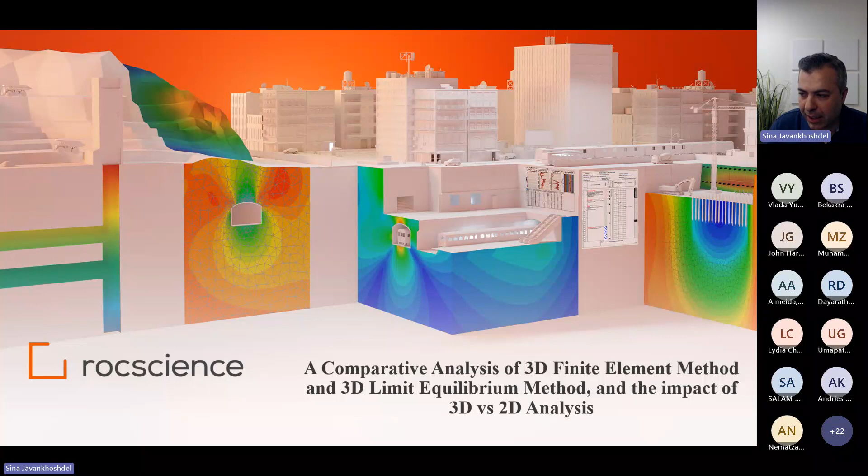The title is a comparative analysis of 3D finite element method and 3D limit equilibrium method, and the impact of 3D versus 2D. As Rajit mentioned, I'm the product manager of Slide2 and Slide3 software and have been working on these finite element and limit equilibrium software packages, making models for customers for the past 7 years.

First of all, this is not an advertisement webinar. I'm trying to keep it technical, but obviously I use Rocscience software to show you what these impacts are and what the details are. I'm going to warn you, some of you may not agree with what I say and may have questions. I totally understand the different aspects and different thoughts on these concepts because they are very broad. But these are based on our experience at Rocscience and my personal experience, and I'll show you different practical models as well.

Before going to the technical part, I just want to introduce us and show you some details about Rocscience. We are the world leader of innovative 2D and 3D software for civil, mining, and geotechnical applications. We have over 25 years of experience, more than 10,000 customers around the world, and we really are the world leader of 2D and 3D software packages. We have 18 software packages for different applications, but I'm not going to talk about all of these, only 4 of them. I'll show you which ones I'm going to talk about.

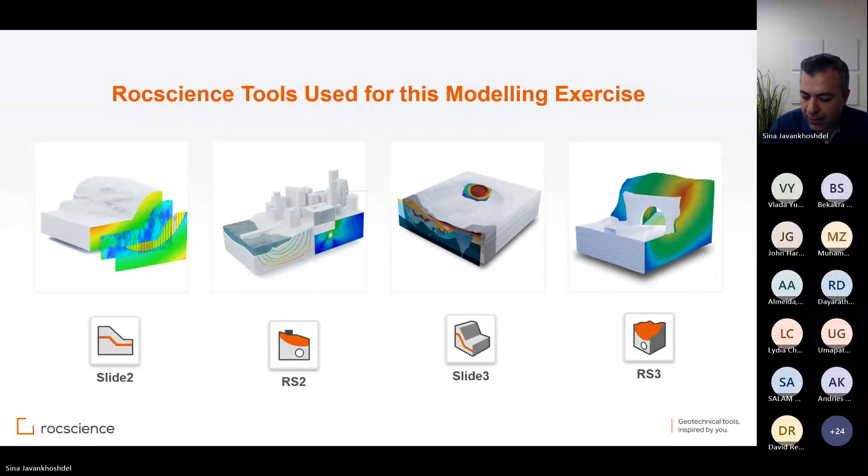So part of this presentation comes from a developer's perspective, because as a developer of software, you need to think general. You can't just focus on a specific thing. This helps us understand the details more of what our customers need, what they think, and what we should do on our side. So let's jump into the presentation.

The other thing before I start: I'm making a case, I'm telling a story here. So I will go step by step to the end, and hopefully we reach a good conclusion. Let's start with simple 2D limit equilibrium analysis and see what's going on there, and then we go further.

So basically, when you want to do any 2D limit equilibrium analysis, you need to consider all these aspects. You need to have a slope geometry. You need to know your geological models, which are the layering, slope layering, soil profiling. You need to know the groundwater condition, the loading of the model.

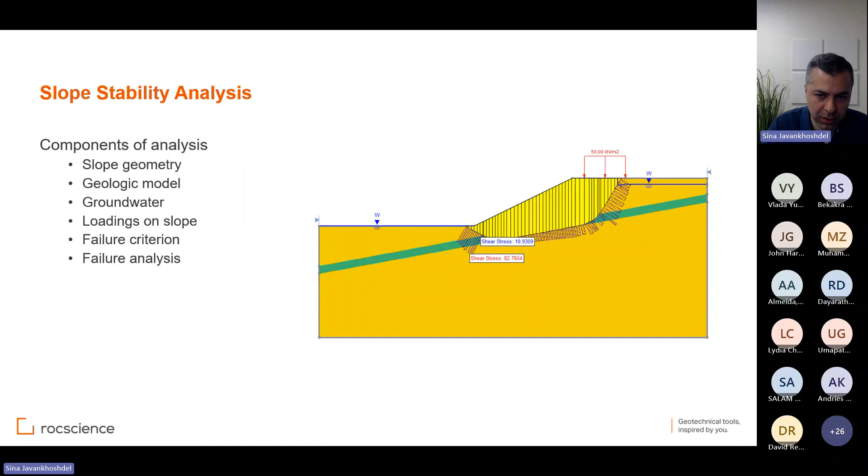You need to define your failure criterion, which are constitutive models or material models. And then you need to decide about the failure analysis. So here we do limit equilibrium and finite element analysis. We do finite element analysis for the failure analysis part.

In limit equilibrium analysis, there are two steps that some of you might not know is actually what's happening. First, we compute the shear strength required along the potential failure surface to maintain stability. So the goal in limit equilibrium is to maintain stability and calculate the equilibrium condition. Then we compare the required shear strength to the available shear strength.

So what is available shear strength? It's coming from your soil properties that you define and the criterion that you define. For example, here we define Mohr-Coulomb failure criterion. So you know your available shear strength.

A lot of times you don't know your required shear strength, but you know the goal factor of safety that you want, and then you calculate your required shear strength. So you know that C plus sigma tangent phi, which is the Mohr-Coulomb, and you know the factor of safety, the goal factor of safety, and you want the required.

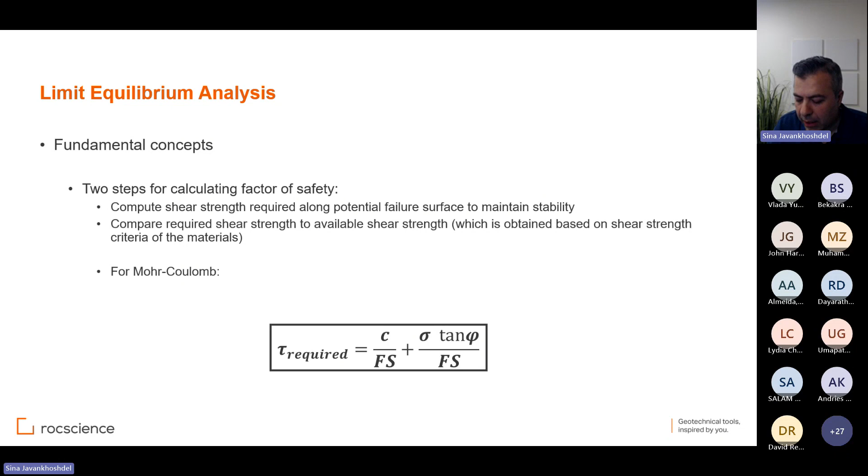In a slide, you don't know the factor of safety in advance. So you have the required shear strength, you have the available shear strength, and based on the calculations, you calculate the factor of safety. Keep this equation in mind, I'm going to use it later on in the presentation. It's a very important equation that we're going to talk about later.

So limit equilibrium analysis in 2D is called the method of slices, because we can't solve for this factor of safety by only solving based on one critical slip surface. So this is an unknown problem, and we have to simplify it to be able to solve it for the factor of safety. That's why we divide it into slices to make it simpler.

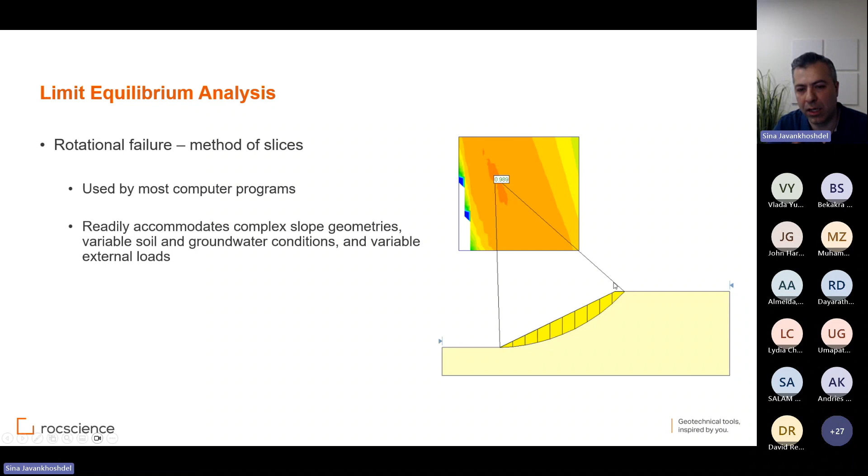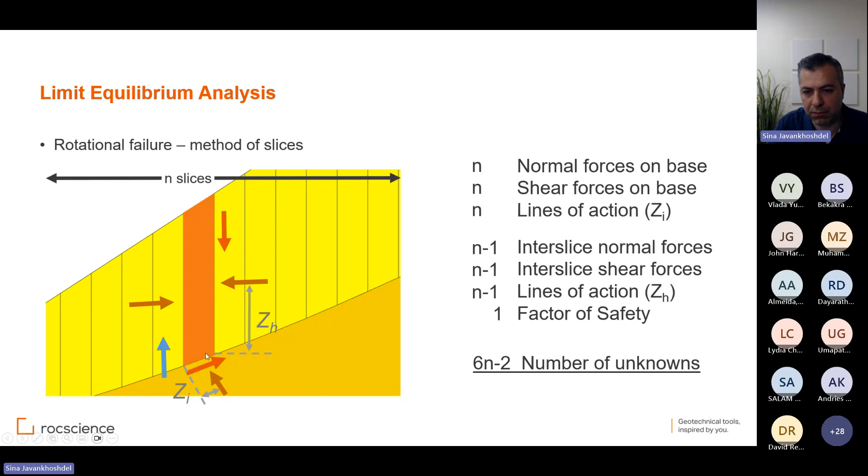For these slices, let's say we have n slices. Let's see what we have as unknown parameters. We have n normal forces on the base, n shear forces on the base, and also interslice shear and normal forces. The other unknowns are the factor of safety and the location of these forces applied to the base and side of each slice. So there are so many unknowns, 6n minus 2 unknown parameters.

How many known parameters do we have? We have 3 equilibrium equations: moment, horizontal force, and vertical force. And we defined our failure criterion, which is Mohr-Coulomb failure, so we have n Mohr-Coulomb relationships as well. So the total is going to be 4n.

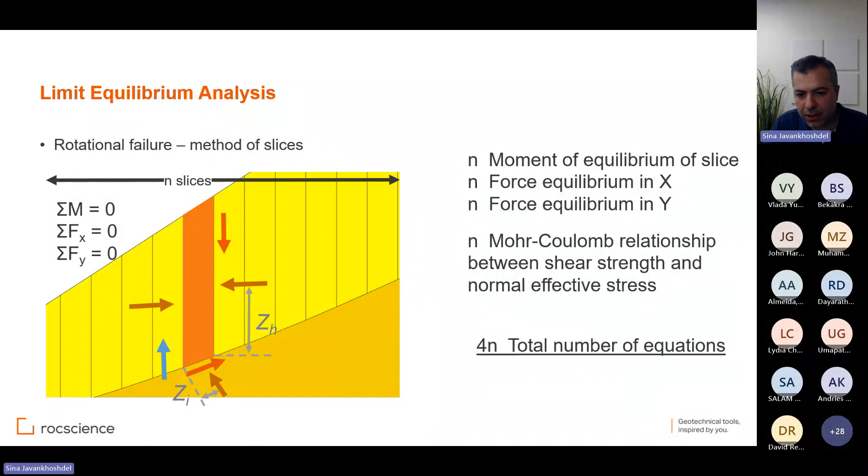We still need a couple more known things, so we have other assumptions. One of the most important assumptions is that all the forces are applied at the midpoint of the base of each slice. So Zi is equal to half of the base of a slice. That gives us another n known parameters. So we are left with n minus 2 unknown parameters.

And we need to solve these equations. That's why we have 11 limit equilibrium methods to calculate factor of safety, all coming from different assumptions that they use to solve these n minus 2 unknown parameters.

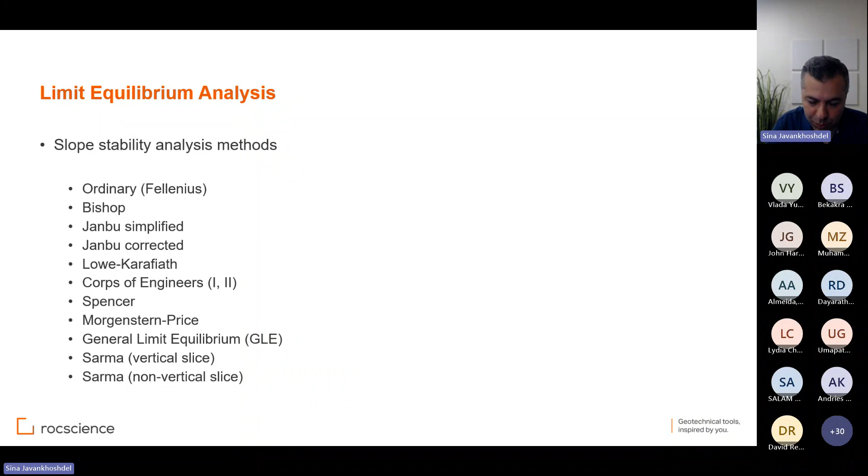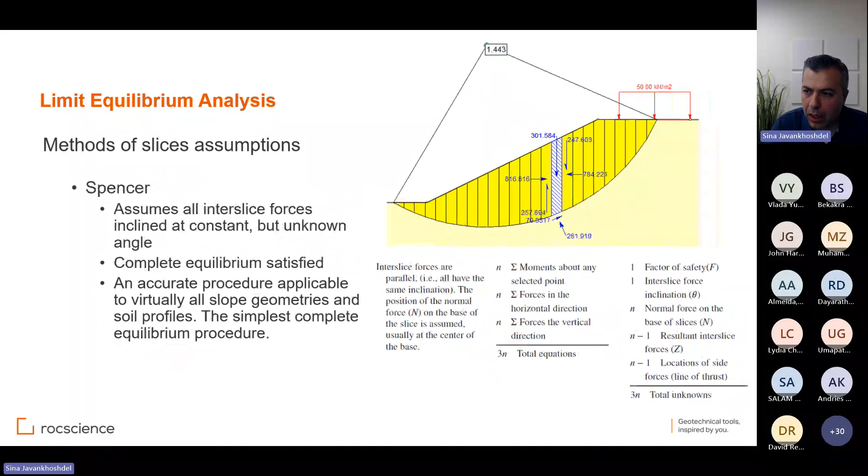We focus only on 4 of them: Bishop simplified, Janbu, Spencer, and GLE. Basically, they have different assumptions. Bishop assumes that interslice shear forces are 0, and Bishop only satisfies the moment equilibrium. Janbu has the same assumption, so shear interslice force is 0, but it only satisfies the force equilibrium. And Spencer and GLE, or Morgenstern Price, they satisfy all the equilibriums.

The only difference that they have is about the direction and the angle of the normal interslice force applied to each slice. Something interesting to know is Janbu always gives you the lowest factor of safety compared to the other methods.

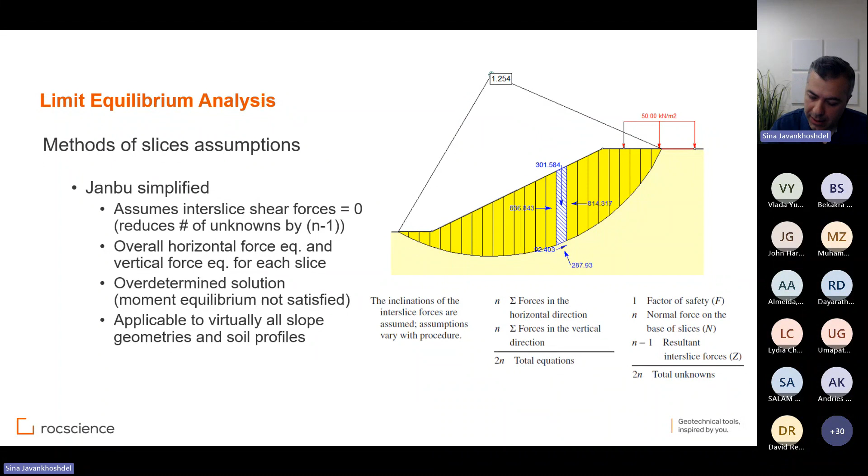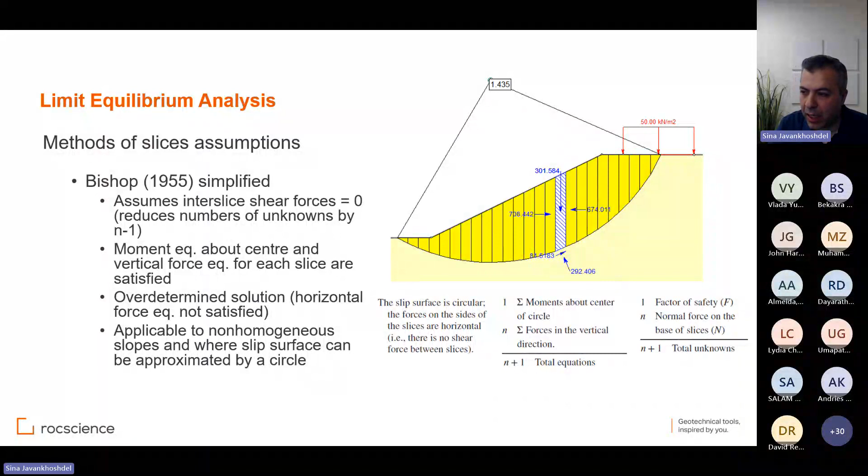When you use non-circular methods, do not use Bishop, because Bishop only satisfies moment equilibrium, and the moment is going to be around the center of the radius. For non-circular methods, we change this center all the time, so for some models, Bishop cannot give the correct answer. But Janbu and GLE and Spencer most of the time give the most accurate results.

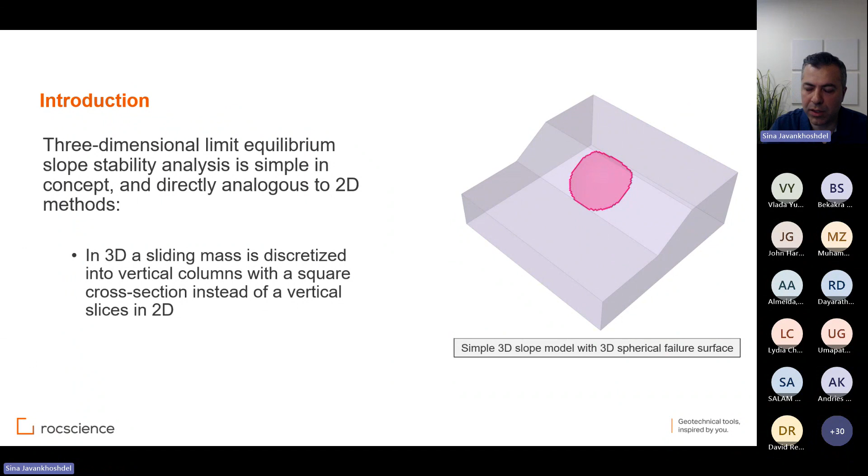How about 3D limit equilibrium? So we talked about this method of slices. 3D equilibrium is the same concept—that one is in 2D, this one is in 3D. Instead of method of slices, we have method of columns.

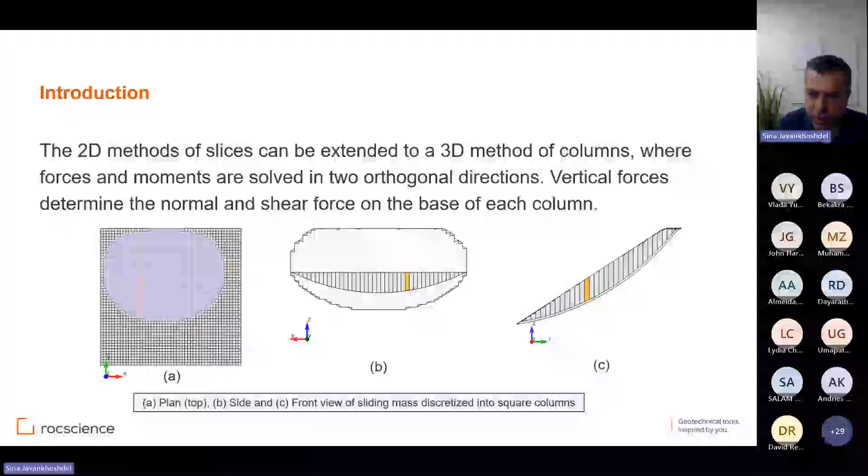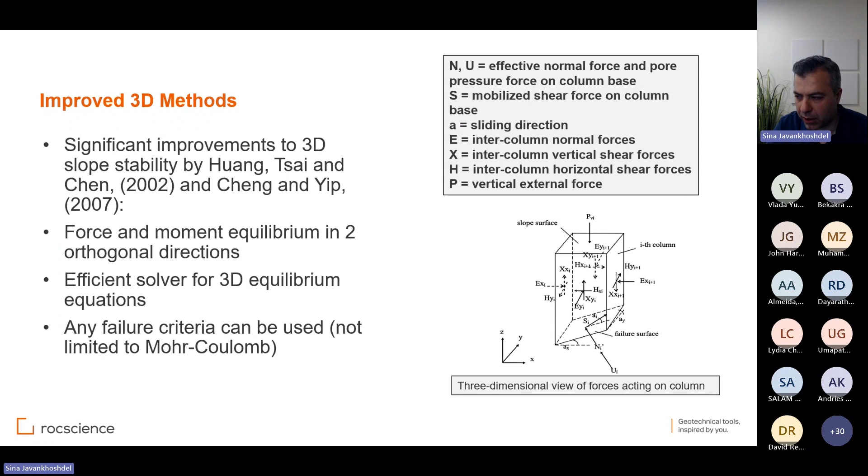However, you have so many forces in different directions because it's in 3D. It's not like horizontal, normal and shear. Your shear can be in different directions, normal can be in different directions. So we solve in different spaces actually, XY, YZ, and XZ, different directions.

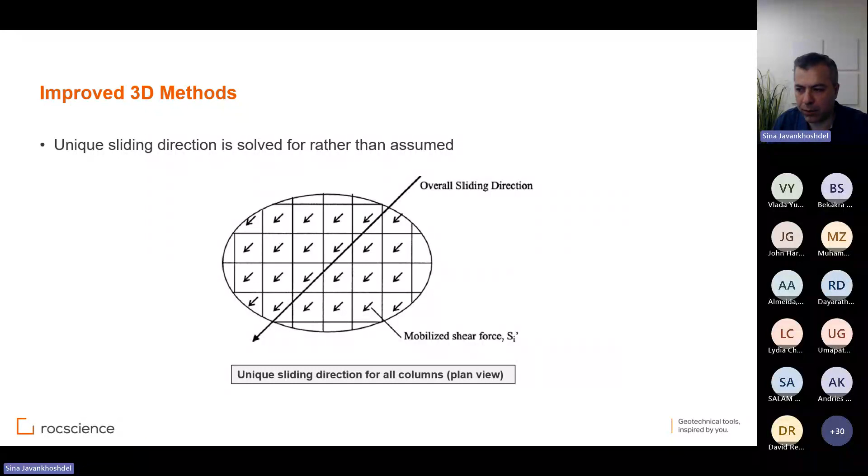I don't know if it still exists in other software packages, but it used to be for the 3D limit equilibrium, originally years ago, you had to define the direction of failure, because in 2D you say okay, left to right, right to left. 3D is not like that—it's more general, so you had to define the direction of failure. But now, for example, in Slide3, we give you the direction of failure.

I'm not going to go through the details of these equations. The thing that I want to mention is that in the 3D limit equilibrium, you calculate factor of safety in different directions. But the equilibrium assumption is if you have Fx, Fy, Mx, My, different moment and force factor of safety, they should all be equal to satisfy the equilibrium. And that's the main assumption in the 3D limit equilibrium analysis.

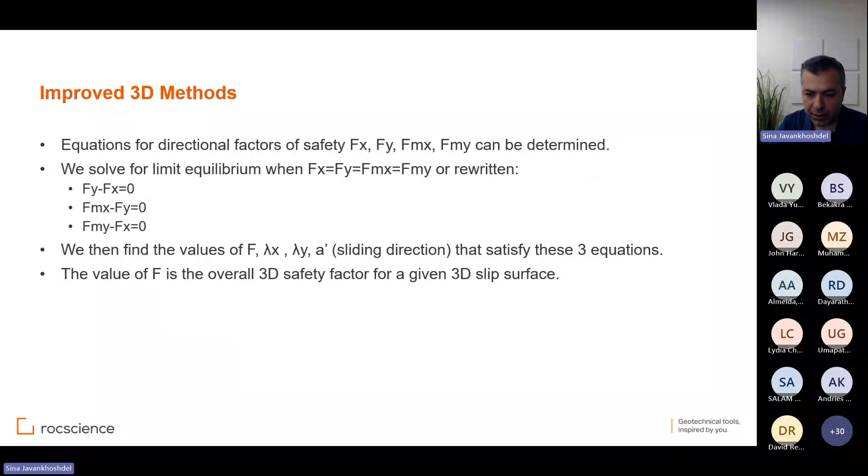So these are the basics of limit equilibrium: Janbu, Spencer. If you go to any software package, any hand calculations, they're all the same. You don't change the Bishop formula, you don't change the Janbu formula—they are all the same.

But something very important that you don't deal with in finite element analysis is the search. As I showed you before, you have to define your slip surface. You have to assume a slip surface first in the limit equilibrium, then divide it into slices. So how do we find that slip surface? How do we define it to properly find our critical slip surface and to represent it? That's the search method that comes to mind.

I know, and you know, that most of the standards are based on the circular search method. This is a nice table that shows you, for what type of problem, what type of search method you should use. These are based on the options that we have in the slide, but it's general, basically.

So for homogeneous slopes, circular is fine, but you can tell me if you have seen any homogeneous slope in your experience. With multi-material models without weak layers, circular can still be a good starting point, but you should take it a little further to a more complicated method like auto-refine that we have in Slide, or cuckoo search.

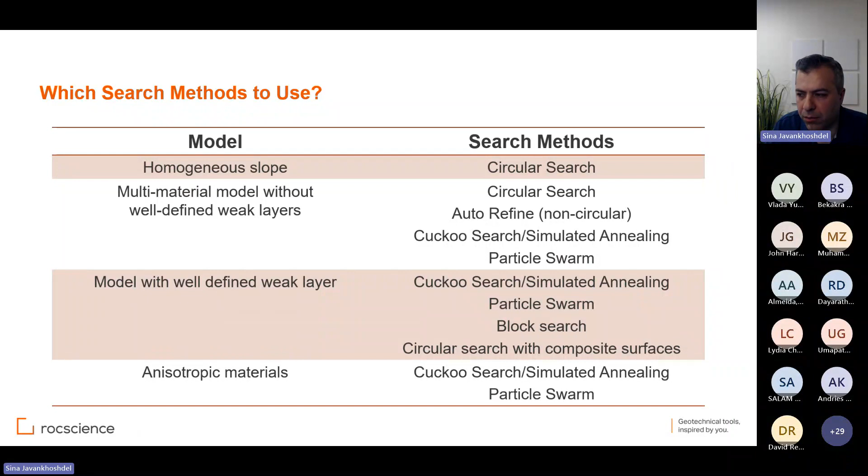I'll explain about those, these are weird names. If you have a weak layer, circular doesn't really help, and you have to go to more advanced methods. We have block search, which a lot of people use for weak layers. You can use that one as well, but it requires a lot of expertise. But if you have anisotropy material, circular doesn't work at all. Or if you have multiple weak layers, circular doesn't work at all.

So you have to go to more advanced methods. What are these methods? Particle swarm, cuckoo search, simulated annealing. Part of my presentation is about the research that we do at Rocscience about different things. I will explain as I go further. These meta-heuristic methods are methods that we borrow from other fields. For example, cuckoo search is applied in mathematics in different fields, and is the way that cuckoo birds put their eggs in other birds' nests, and there is a flow, there is an algorithm.

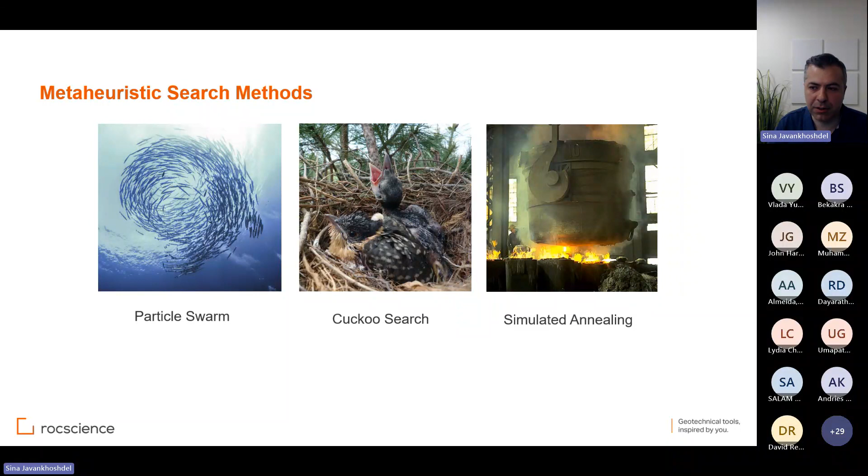We use that one for geotechnical application and find critical slip surface. Particle swarm, simulated annealing, the same thing - we borrowed it from nature. What are they? They are basically non-linear equation solvers. We use this kind of algorithm flow to solve nonlinear equations. What is our nonlinear equation here? The factor of safety equation is a nonlinear equation. So we use these methods to solve the factor of safety equation, and they work really, really well.

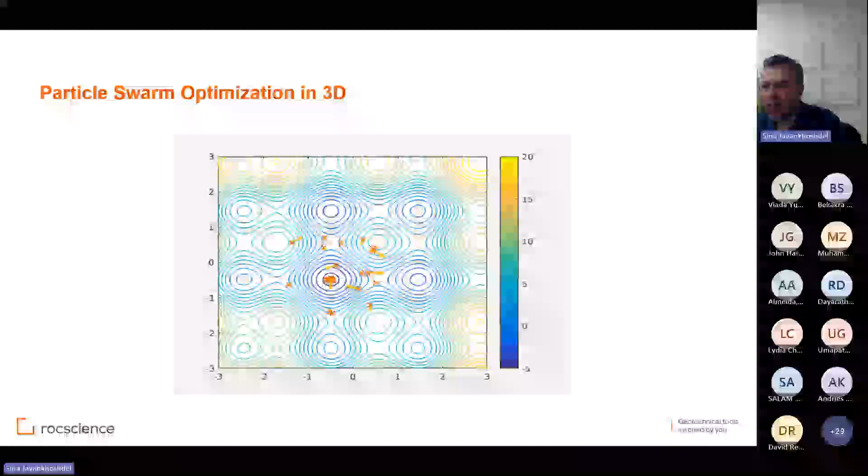This is, for example, about particle swarm in 3D. Basically with particle swarms, you throw particles throughout your entire model, and they try to go to the point with the lowest factor of safety. Here, this is a temperature map, so they try to go to the lowest temperature. But it's the same for factor of safety - they try to go to the lowest point. So that's how they work, actually.

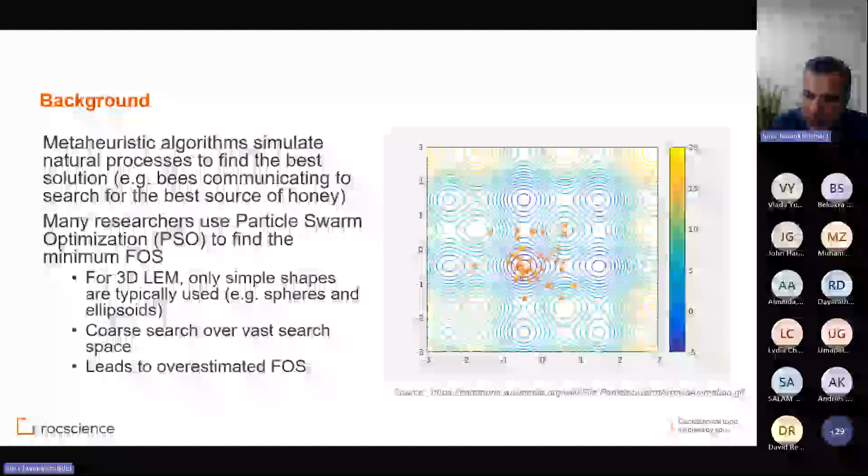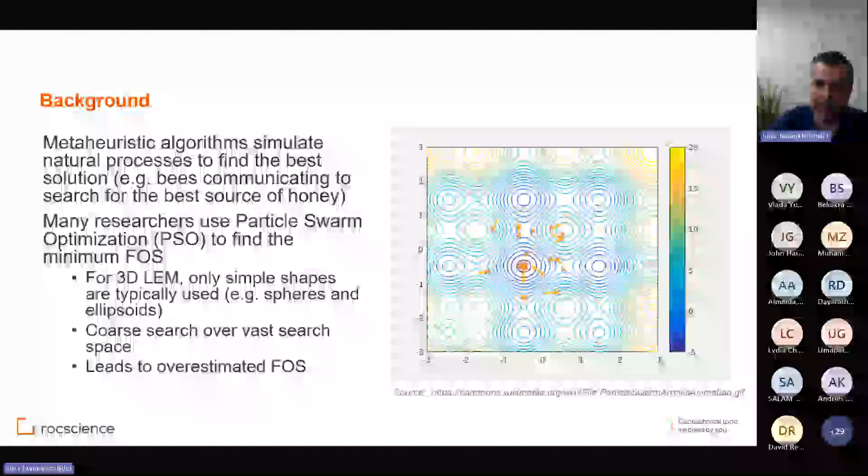But we found that these meta-heuristic methods, especially in 3D, they're not enough because they are limited to spheres and ellipsoid shapes, which are limited shapes. Your failure surface might not be that shape. The search in the big area is very coarse. Like these particles, you can see how many particles you throw - you cannot send particles to every centimeter of your model, that's going to take forever. So you have a limited number of particles to throw in your model to find the lowest factor of safety.

And these meta-heuristic methods lead to overestimated factor of safety. So if in any software you only use meta-heuristic methods, your results are overestimated. Period. It's not something that I make up, it is real. That's why we did some research in-house at Rocscience.

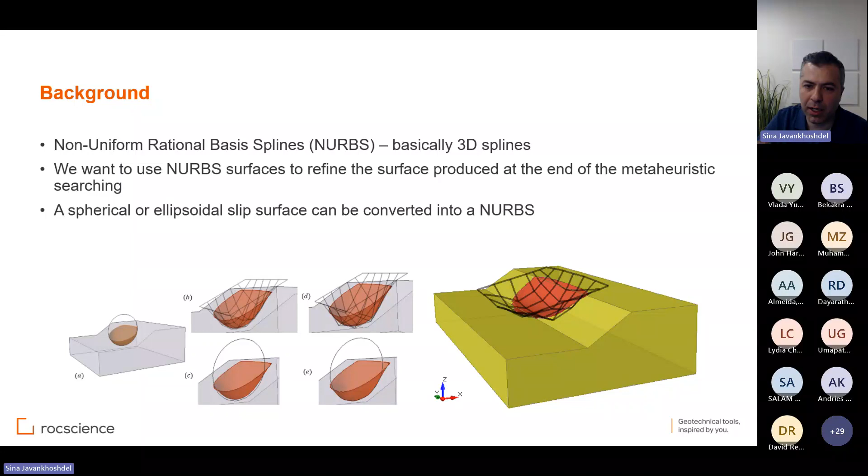A lot of this we did the research in-house, and we came up with a method. Let's say figure A is a sphere shape - we can change this shape, we can play with it to locally optimize the critical slip surface that it found. So to do that, we defined a control net, as you can see in figure B and D, and play with this control net. How to do that? We define a mathematical concept called NURBS, or non-uniform rational basis splines, to change this sphere and ellipsoid to a spline first, and then a spline has the ability to be changed.

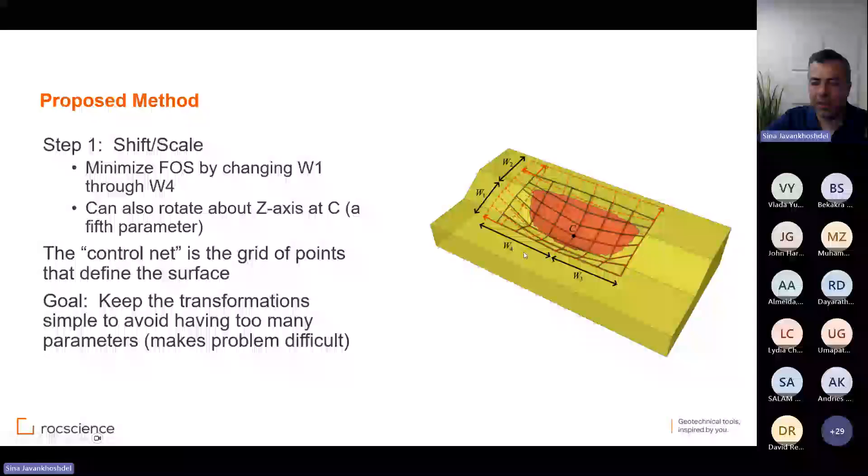So we do 5 more steps on top of these meta-heuristic methods, which are advanced anyways, but we do 5 more steps. We move these, we scale and shift this net, we modify the curvature, we modify the frame up and down, we modify the frame elevation on each side, we stretch like move points towards the end, and we locally optimize the critical slip surface.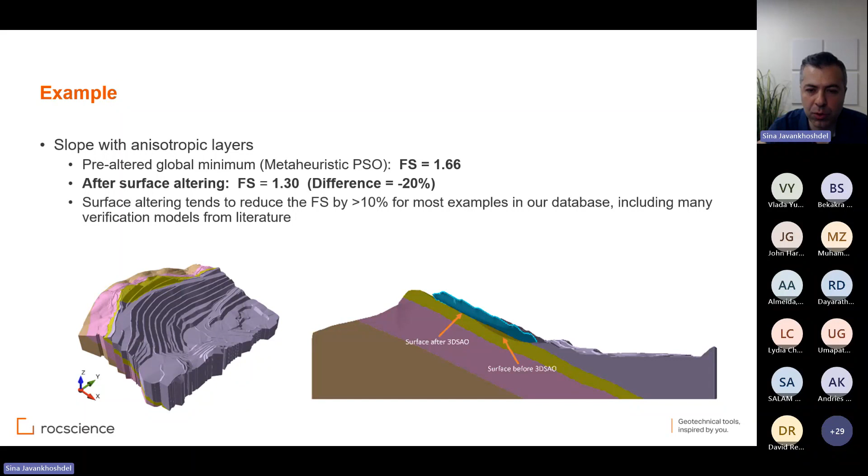So in Slide 3 and Slide 2, this option is default: surface altering. Some users, because it takes longer, say okay, forget about the local optimization and only do meta-heuristic because meta-heuristic is enough. If I receive a tech support request like that, I don't even look at it, because I am telling the user directly that this is inaccurate.

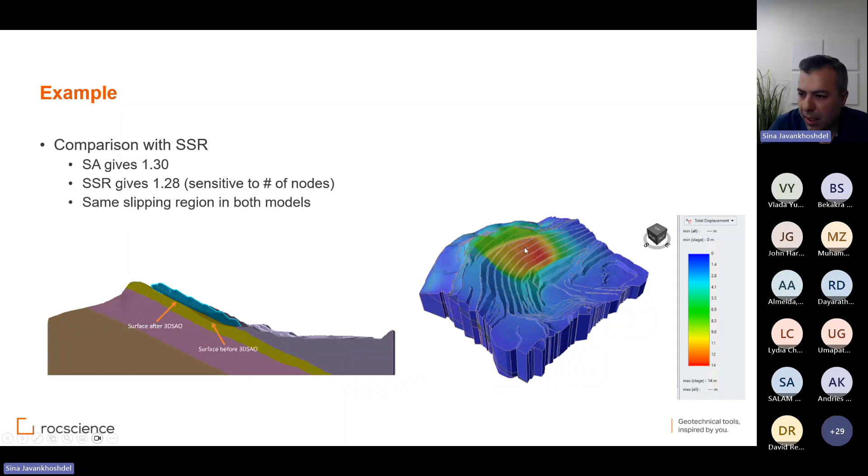So if you don't do local optimization, your results would be wrong. And we always confirm our results with finite element, and we got the same failure mechanism, same answer using finite element. I'll get into that later. So far, what I showed you was changing meta-heuristic to local optimization, and we changed them to spline search methods.

So basically, these surfaces in 3D, you have to solve some parameters. For example, for spheres, you have 5 parameters: start point, end point, and the rotation of the sphere. It's similar to a circle. For an ellipsoid, you have more parameters — some angles and radius, because the radius is not constant, so you have more parameters.

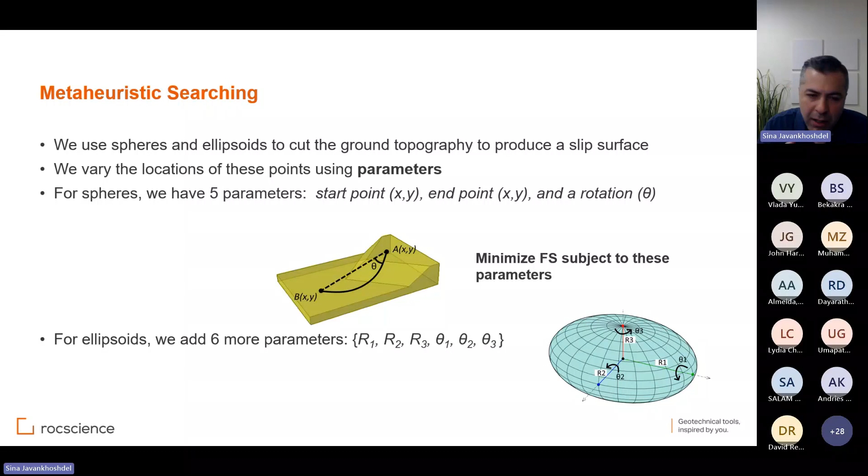But we found that for the sphere and ellipsoid, even though we try to change them to NURBS or splines, they don't work very well. So that's why, again, we developed a method in-house called spline. So basically, that's how it works.

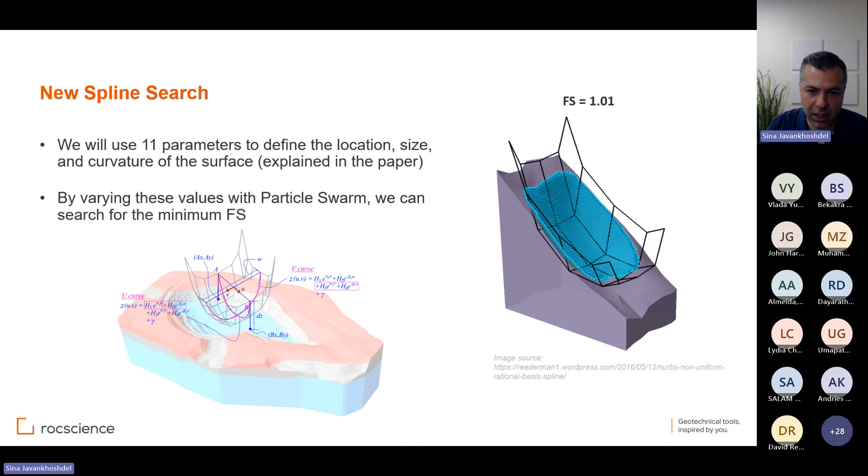Without even assuming any failure shape, like a sphere or ellipsoid, we directly solve a spline surface. So a spline surface has 11 parameters to solve. Compared to the other two, it has way more parameters, but it is very flexible. So instead of starting from a sphere to an ellipsoid to a spline and then surface altering, we directly start from spline, which is more complicated, but way more flexible.

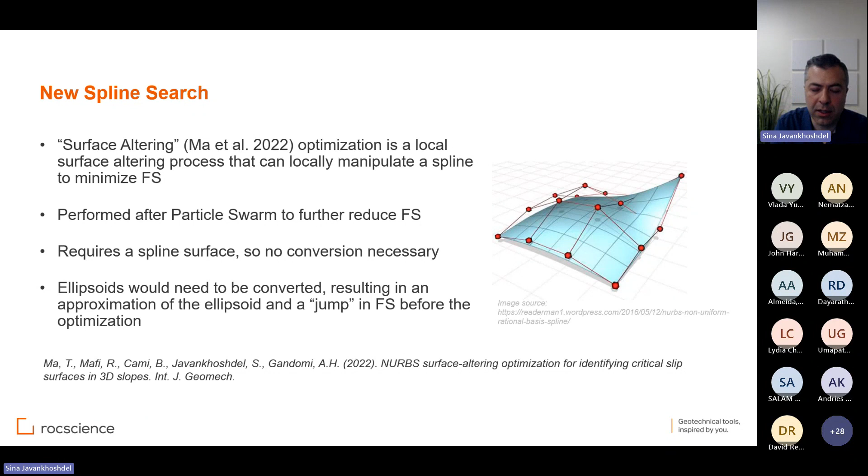By the way, you can go to my Google Scholar. All of this, we publish in journals. So this one is a recent journal, NURBS Surface Altering Optimization, in the International Journal of Geomechanics. So all the research that we do at Rocscience, we publish. You can go to my Google Scholar or ResearchGate and download these papers to read the details.

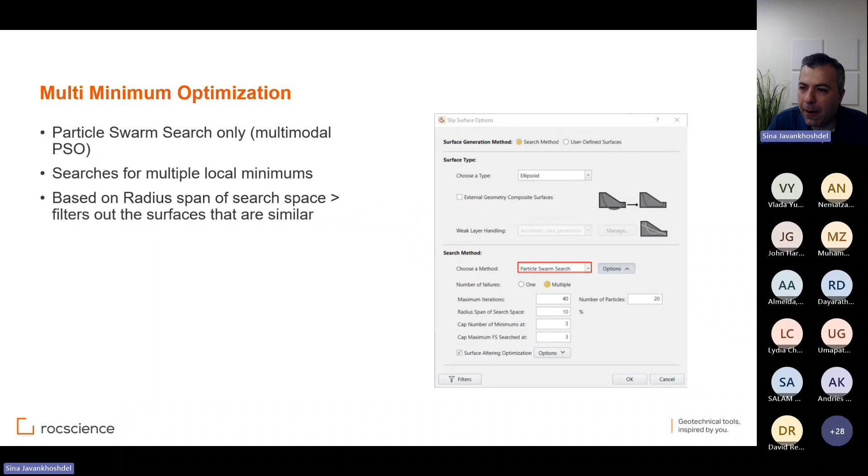But good luck with that, because there are a lot of local minimas, and even advanced search methods might get trapped in these local minimas and not give you the global minimum. How do we solve that? So we came up again in-house with a method called multimodal optimization. Multimodal optimization doesn't look for the global minimum — it looks for all the local minimas.

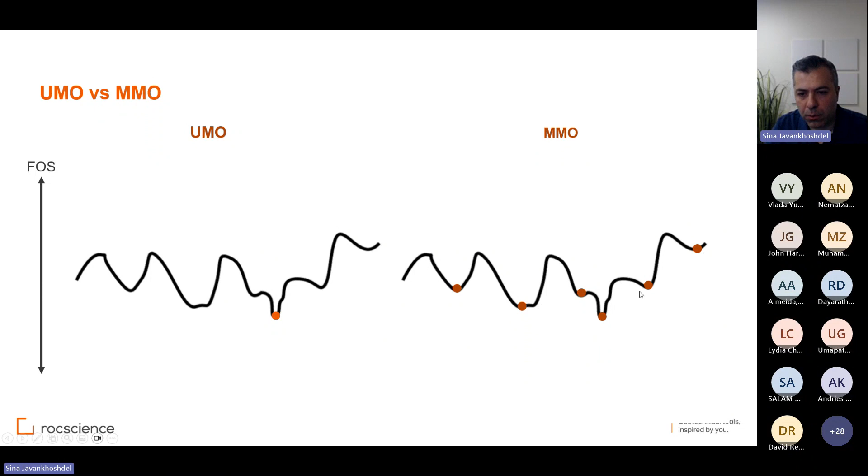Obviously, this global minimum is one of them, and the software is going to give you all the minimums — for example, 3 minimums. It's not filtering the search, it's a search itself. It's based on the particle swarm search. It has its own algorithm, separate from the main algorithm, and it looks for local minimums, giving you 3 or 4, depending on what you choose.

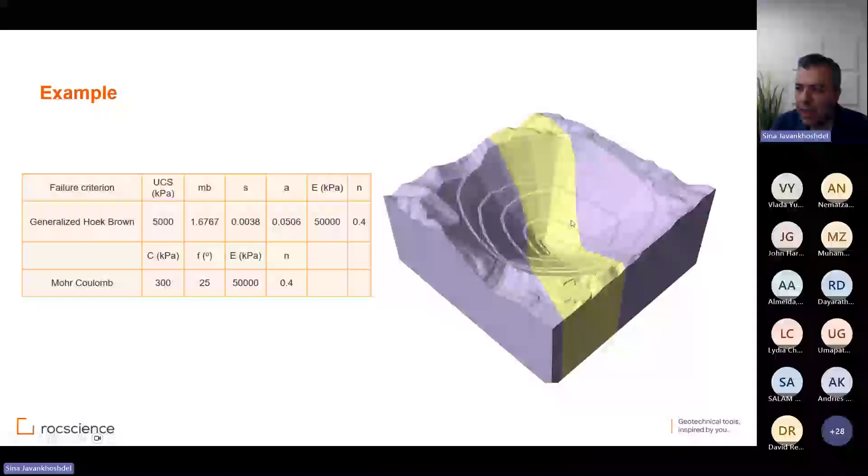Another example: this is an open pit. The yellow region again is a weak material. This is kind of symmetric, so you can expect to have a failure on the north side of the model and a failure on the south side of the model. If you do traditional limit equilibrium, it only finds 1, which has a factor of safety of 1.004.

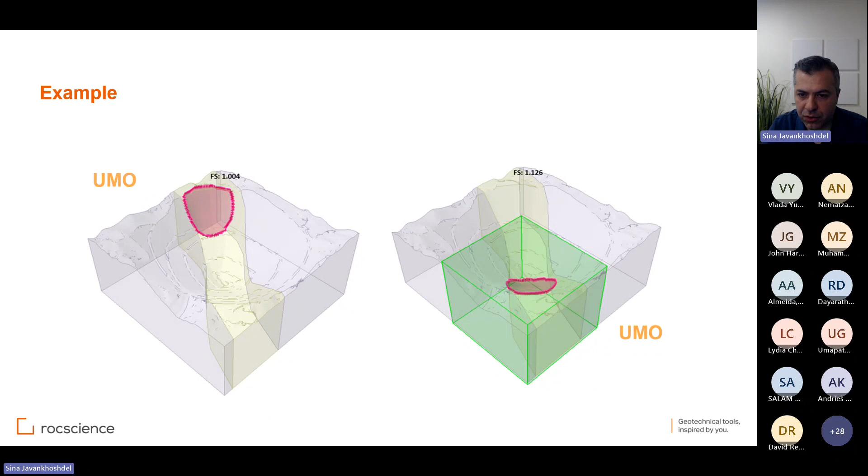If you focus your search on the other side, it gives you 1.12. To me, 1 and 1.12 are both critical because they are way lower than the standard factor of safety. They are not failure, but they are low. If you run multimodal optimization, it not only gives you 1.004, it also gives you something with a different failure mechanism of 0.997. This means 1.004 was a local minimum — it wasn't the global minimum.

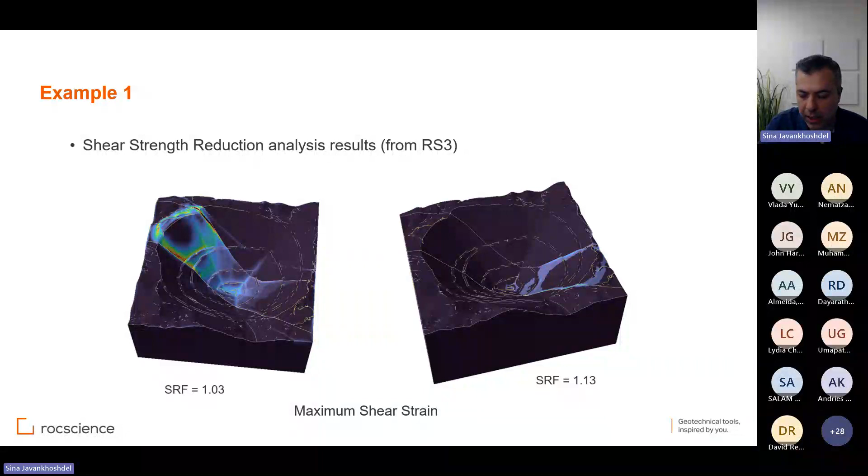And also, it gives you this failure on the other side of the model. So it gives you 3 instead of 1. We always run it again with finite element. So if you run it with finite element, it gives you results 1, 2, and 3 on the other side. So you can see how we match the results with finite element.

Let's discuss 2D versus 3D limit equilibrium based methods, and then we go to the next step.

When do we model in 3D in general? That's a very interesting question. We were always asked about this. When should we do 2D modeling? When should we do 3D modeling? What is the difference? That's part of my talk today.

If you have 2D sections, but the spacing between them is large and those properties change significantly, it's better to do it in 3D.

The most important one is if your boundary conditions are 3D. Sometimes your seepage boundary conditions, your loads, your supports, they are all 3D. You cannot represent them with a 2D model, because 2D assumes that, for example, if you have a load, it has an infinite length normal to the plane of your model. If you have supports, they are all spaced equally normal to your model. So you cannot change them to, for example, non-uniform spacing for supports.

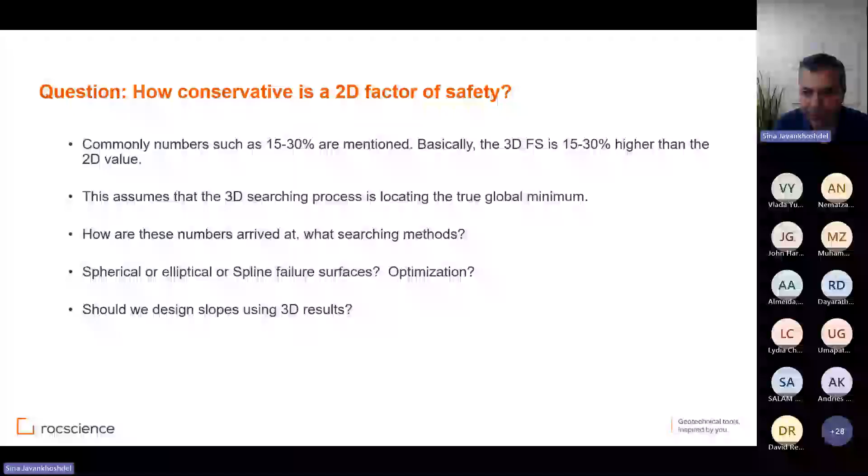That's with the assumption that 3D searching is locating the true global minimum. But you should question what methods they are using, what surface shape they are using, and whether we should design a slope using 3D results or not. These are the questions that we need to ask.

So I'll go through a couple of examples. I see questions, I can answer them along the way, but I can leave them to the end. I think it's better to leave them to the end so that I can keep track of my time. That's right, yeah, okay, sure.

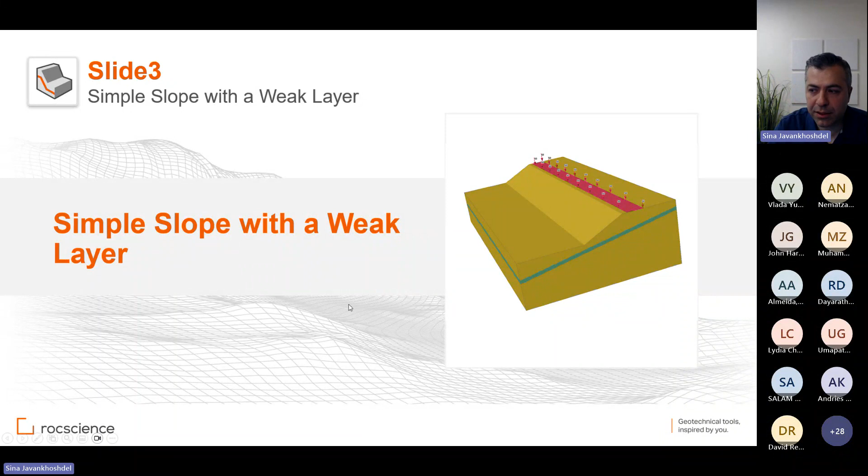Let's look at the first example, a simple slope with a weak layer defined. This is an extruded model. Extruded models, by the way, should act exactly like 2D models because everything's the same, it's just like a bunch of 2D models stacked together, they are exactly the same. Because everything is symmetric, we looked at the results and the difference is about 6%.

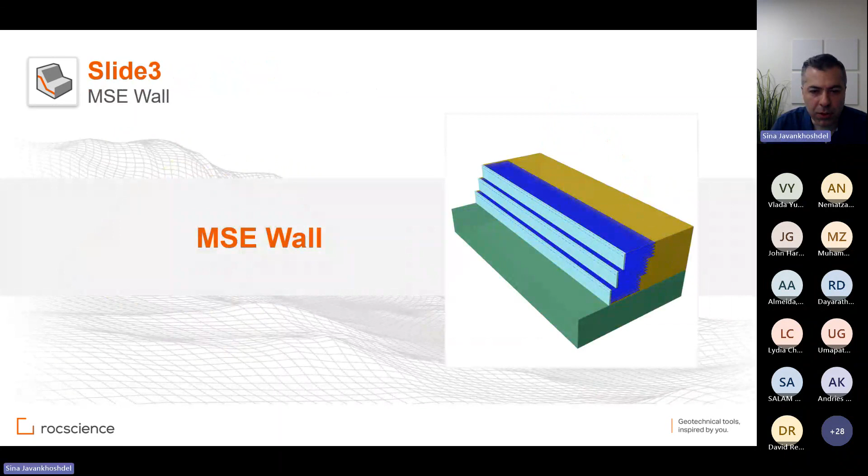Next model, MSE walls, again extruded, difference is about 6%, 1.08 compared to 1.01. For MSE walls, the reason for this difference is the shape of the slip surface, because sometimes you show an external failure mechanism for a slip surface, but external doesn't mean anything in 3D, because in 3D a slip surface must intersect the reinforcements. It's not like 2D where it's a line going behind the reinforcement, we don't have such a thing.

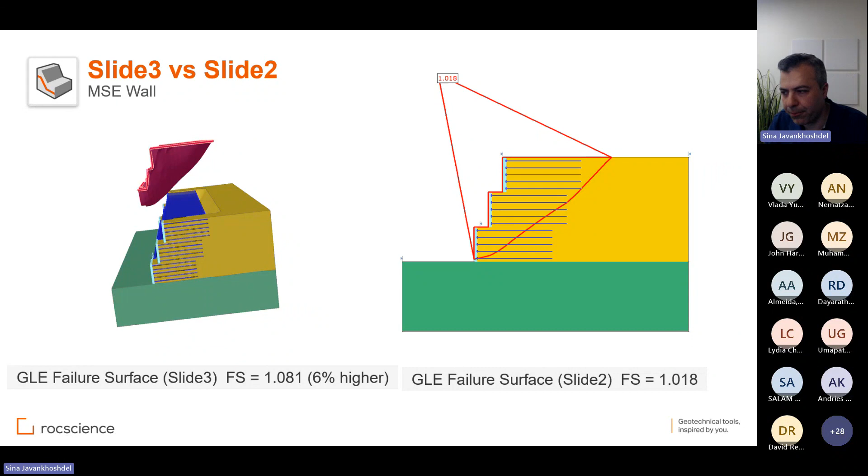MSE wall models: 6% difference for this model. Coal mine, these are complicated models, 5% comparing 3D to 2D. Another complicated open pit mine, 12%.

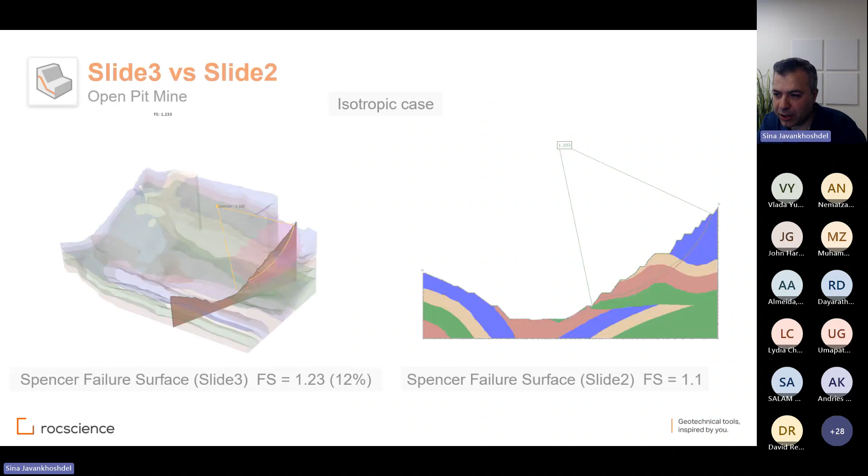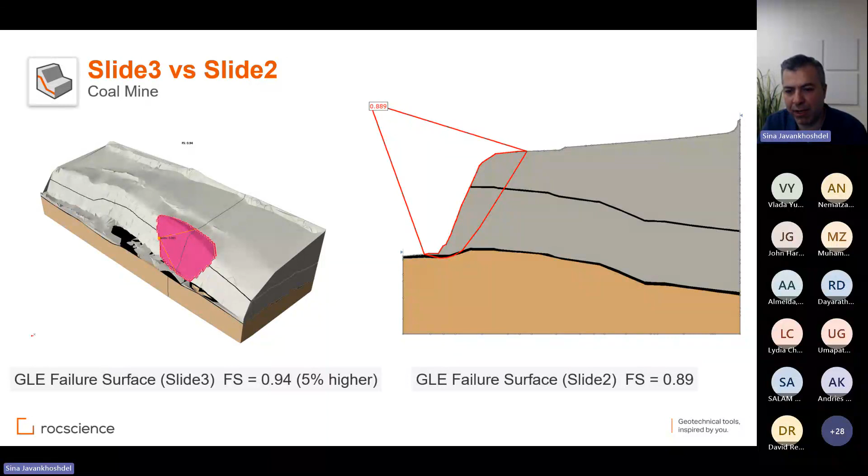And these all depend on where you take your 2D section, by the way. Your 2D section, if you want it to be more accurate, it should be right in the center of your 3D failure surface. Otherwise you can't even compare the results, because 2D is going to give a totally different factor of safety. But in the middle of your 3D failure, sure.

So first of all, the difference is way smaller. The maximum difference I've seen is 15 to 20% maximum. Local optimization is very critical in both 2D and 3D to be able to compare. Design should be a combination of 2D and 3D, not just based on one or the other, and we always recommend calibrating your results with radar data as well. Do not assume you can use less support because 2D results are conservative, not unless you're extremely sure you have the correct global minimum in 2D. So that's a very important question.

Now, we compared these examples that I showed you with finite element as well. So for 3D, you can see that 3D limit equilibrium gives 1.45, finite element gives 1.45 as well.

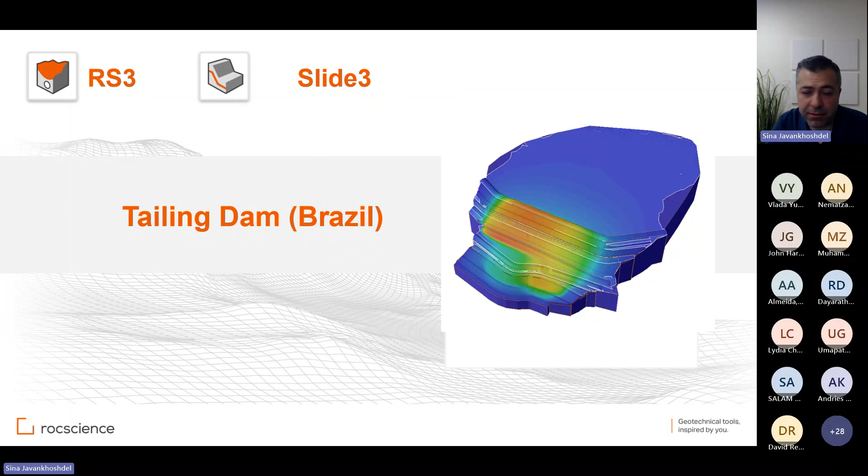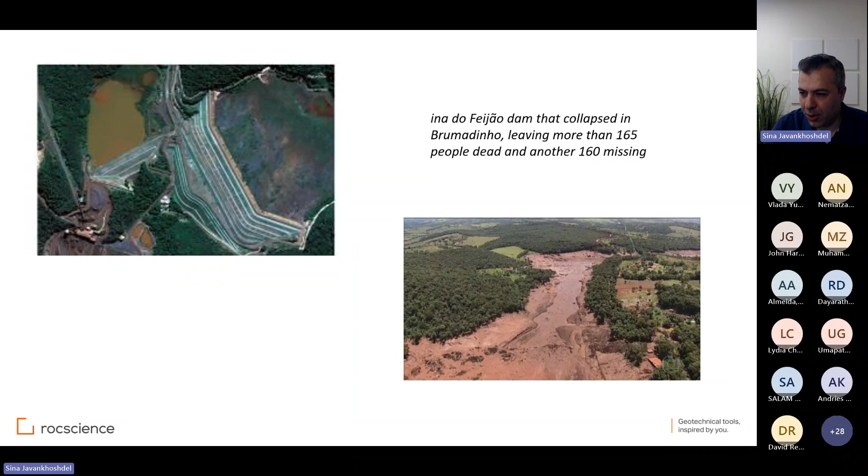Now I want to take you to an example. This is a model that I created years ago, but this is a tailing dam that failed in Brazil, killed a lot of people—165 people got killed and another 160 got missing. So to show you what happens, this is the tailing dam and this is the time that it failed. You can see how it filled all these channels.

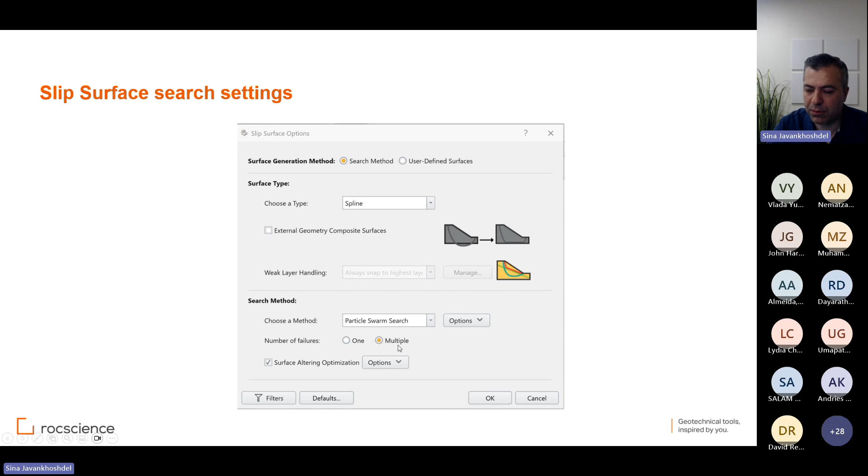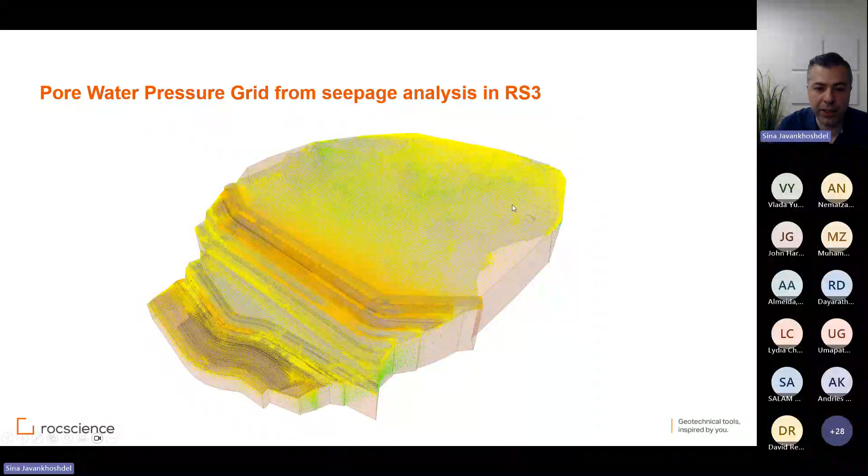So I modeled it using Slide3. I used a spline search, which is this new search that I talked about, particle swarm optimization, and I used multiple option, which is a multimodal optimization. I calculated seepage analysis in RS3 and brought the seepage result as a grid into Slide3.

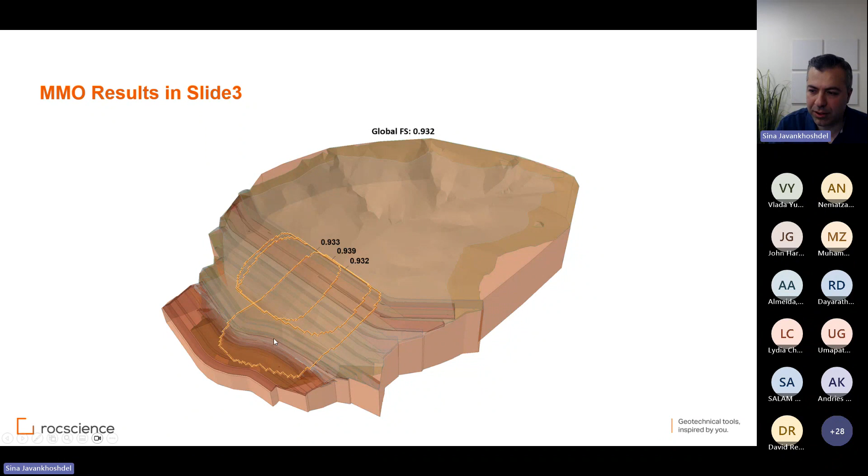So we have 3 different failure surfaces for this model, all 0.93: one failure surface, 2 failure surfaces, and another one which is a totally different failure surface, some sort of L-shape mechanism. At the time when I did this model, we didn't have a spline, and I couldn't capture this big one because a sphere and ellipsoid cannot capture this.

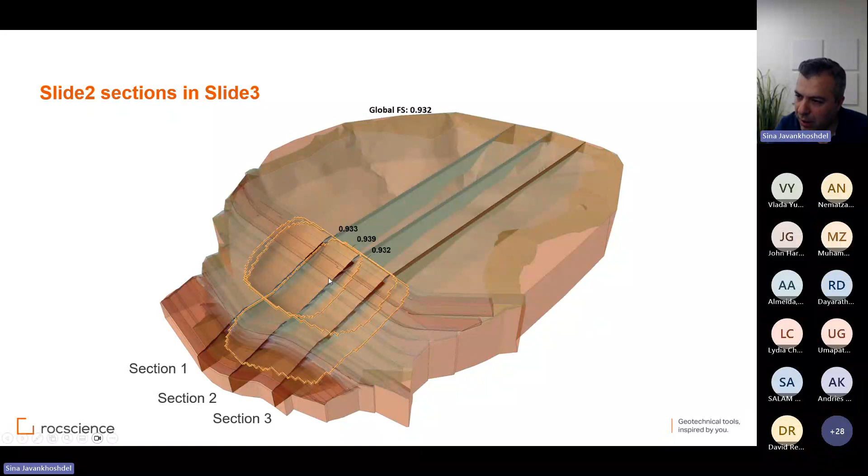So section 1, section 2, and section 3. Two of them have multiple mechanisms similar to what we observed. And section 3—I think here it only captured, sorry, section 2 is in the middle—it couldn't capture the multimodal mechanism. So you can see that.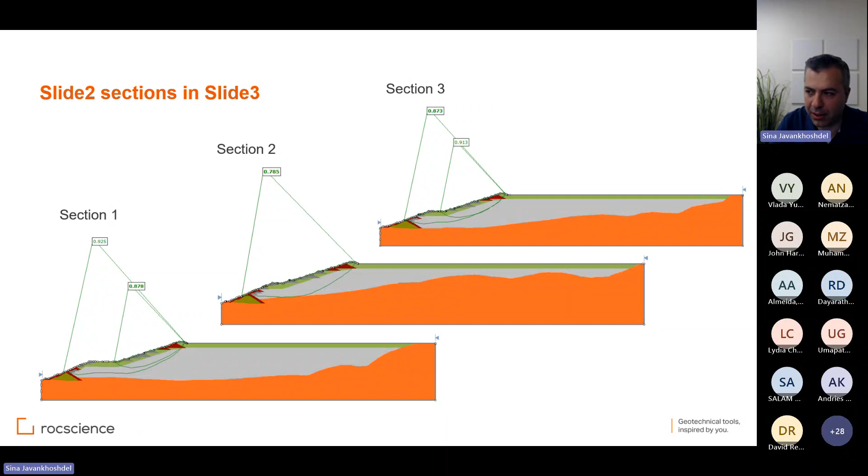Also comparing factor of safety, 3D gave 0.93. 2D is very close, but this one is way lower. Again, close—depends on where I took the section, the difference might change. That's what I have been talking about. And these are the 2D results on top of the 3D results, and you can see that the 2D failure surface captures very nicely the 3D failure surface.

But how do I be sure that these are true failure surfaces and failure mechanisms? Should I trust 2D and 3D limit equilibrium, or should I have something else to verify the results? That's the main question. So that's why we always recommend comparing your limit equilibrium results

with the finite element results. There is a belief in the finite element world that limit equilibrium is not a good method and you cannot capture a proper failure surface and failure value. But we moved past that—limit equilibrium they're talking about is the circular Bishop method from 30 years ago. We moved these limit equilibrium concepts way further, with complicated search methods and complicated optimizations.

So as long as you use the same material constitutive model—limit equilibrium is limited to elastic, perfectly plastic, I know that—so as long as you use the elastic, perfectly plastic model, which 90% of people who do slope stability use, you should get the same answer using finite element and limit equilibrium. There are exceptions like toppling, or if you have support, I know these are different. But if you have simple models, or a model like this tailing dam, there is no reason you would get a different answer using finite element.

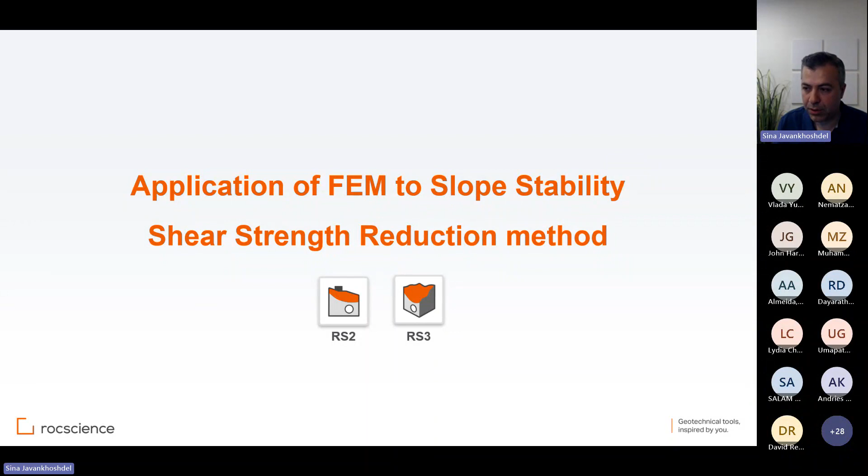So limit equilibrium pros: it is the most commonly used method in practice because it's a simple, quick analysis. You can do sensitivity analysis, and you don't really need a lot of information—you just need a couple of parameters, and that's it.

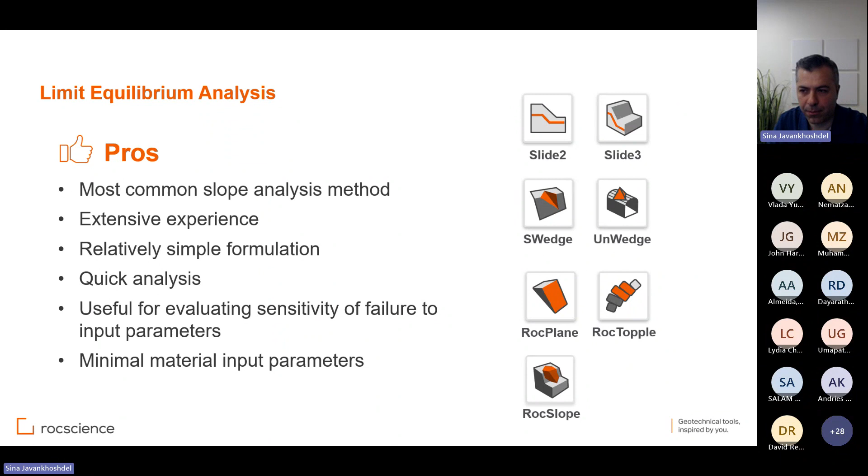Cons: the failure mechanism should be assumed in advance, but with the spline I showed you, we are very flexible—you don't have to really be worried about that part. The main con of limit equilibrium is neglecting stress-strain behavior, and it doesn't provide you any information regarding deformation. That's the problem.

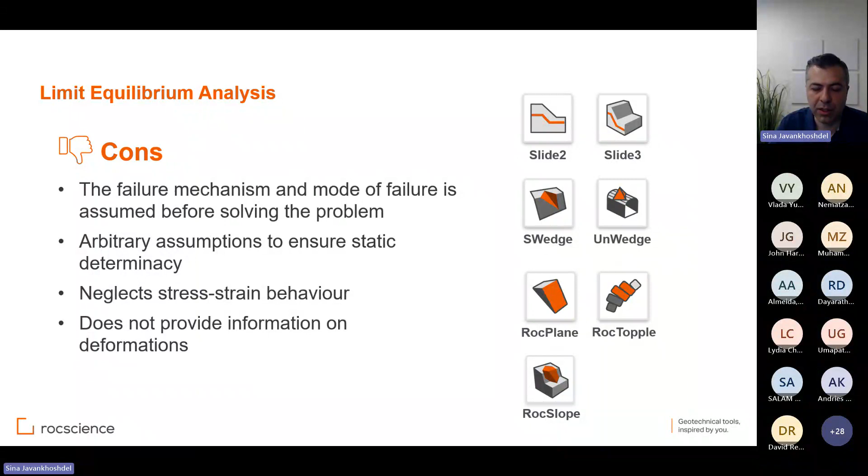This is a quote from Bishop, and I told you to remember an equation. It says the factor of safety is defined as the ratio of the available shear strength of the soil to the required shear strength to maintain equilibrium. The shear strength mobilized, therefore, is equal to this.

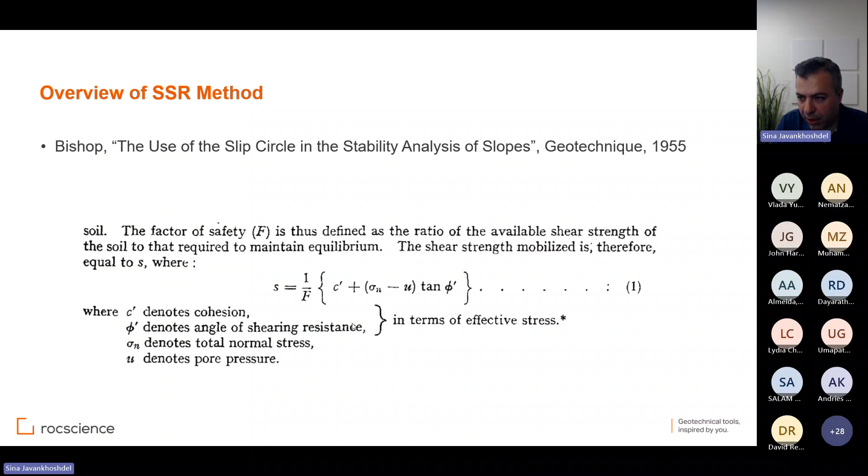This is based on a method in finite element analysis called the shear strength reduction method. So we are actually doing the same thing in finite element analysis, similar to limit equilibrium. We are reaching equilibrium using the shear strength reduction method. This is for Mohr-Coulomb. We are reducing the Mohr-Coulomb failure envelope with a factor called the reduction factor, and we calculate the factor of safety. That's how we do it.

We reduce the parameters by a factor called the reduction factor. We compute the finite element model. If the analysis fails and does not converge to a solution, we reduce the factor and recompute. If it converges, we increase the SRF factor and recompute. The factor of safety is this reduction factor that initiates the failure, meaning that if you increase it a little bit, the solution doesn't converge.

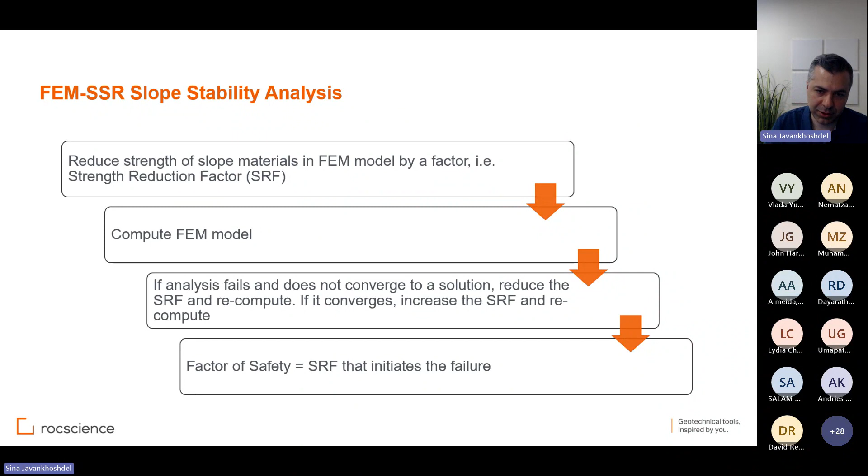So what are the disadvantages of this method? First of all, computation issues. Limit equilibrium is way faster than finite element. There is a quote - this is being recorded, but it's okay, it's everywhere - about finite element analysis: people say garbage in, garbage out. So if you don't have enough knowledge of your input parameters, you get wrong results.

I have a quote from someone. He said we sent results of our lab to hundreds of consulting companies. The most accurate results came from finite element. The least accurate results also came from finite element. It depends on the level of expertise that you have.

The other problem is the definition of instability. In limit equilibrium it is equilibrium. In finite element it is numerical convergence. Sometimes you have a failure, but that's a numerical issue, not the actual failure. And the other problem is that sensitivity analysis is difficult.

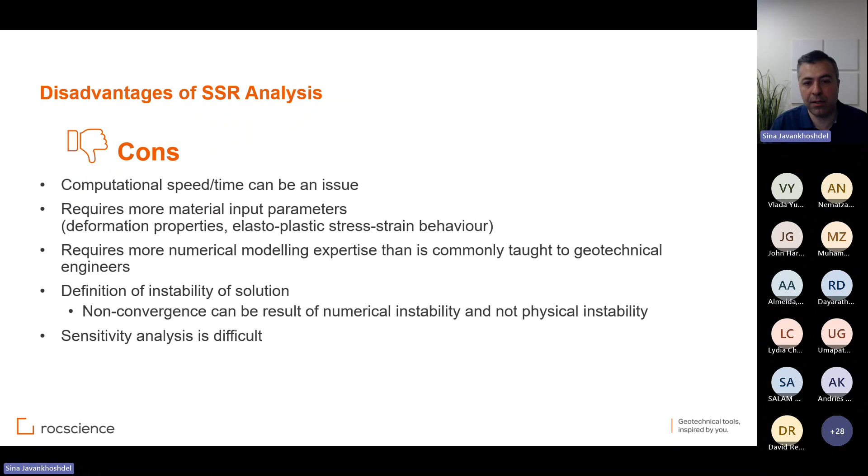But you should use this method to compare with the results of limit equilibrium. That's the verification part. And it gives you information about deformation. It's very robust, it captures failures by stress, and it is flexible compared to limit equilibrium analysis.

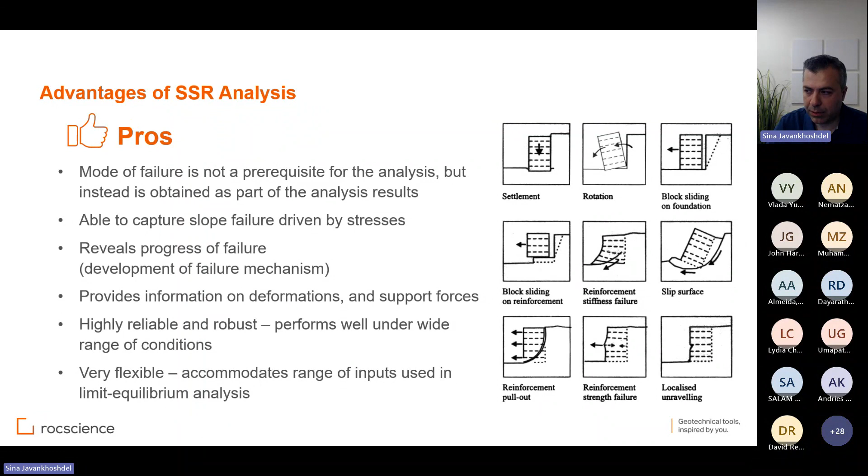So these are all the material models that we have in Slide, and these are material models that we have, for example, in RS2. So they should match if you want to get the same answer.

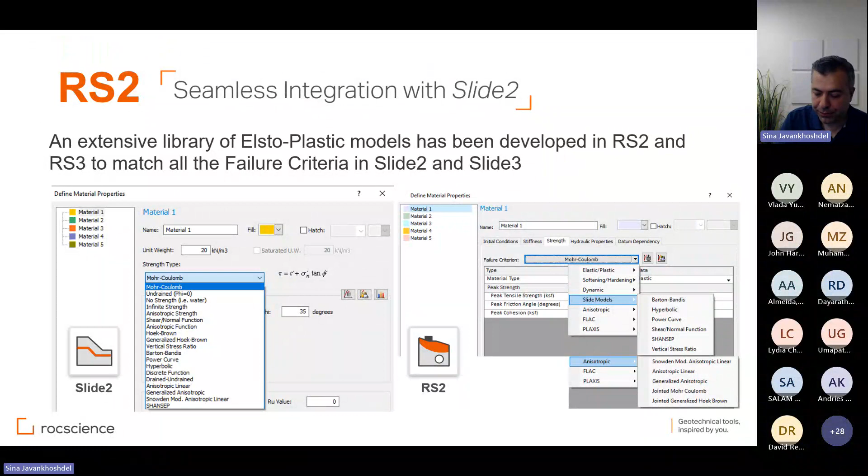Same model - this will take only one or two minutes. This is the tailings dam model, section 1.

We get one failure surface from finite element, 0.88. So this is matching, you can see that they are matching. Second failure mechanism in section 2, a deep failure mechanism - limit equilibrium and finite element show very close failure surface matching.

Multimodal ones are very interesting. Here you can see there are two - one is here and one is here, so this is one and this is another one. Finite element actually captures multimodal failure, and now in Slide we can also capture multimodal optimization, which is very important.

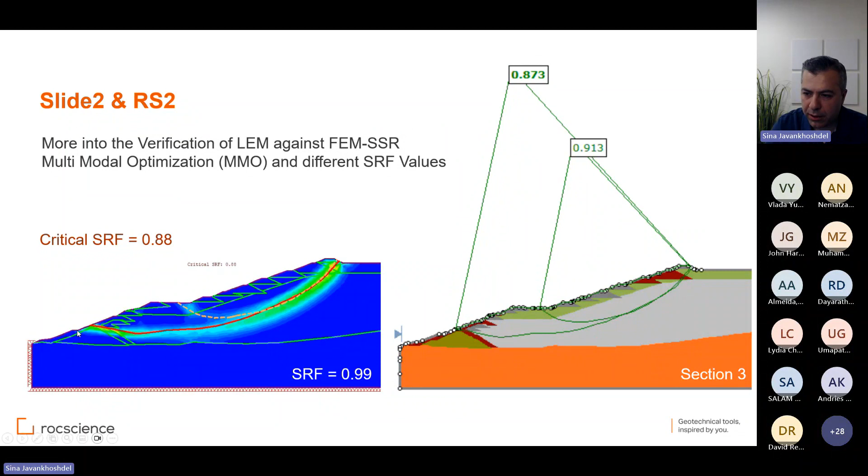And section 3, again, one failure, two failures. So it captures both, and the factors of safety are matching.

Let's go to 3D. This is the Slide 3 model that I showed you. Now let's compare it with the 3D finite element.

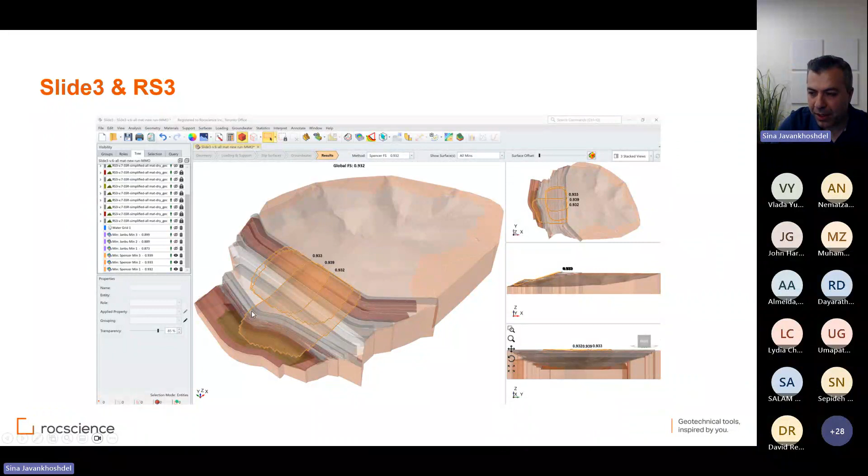0.96, 0.93 - very close values. Just look at the shape of the failure. In Slide, we had to do multimodal analysis to capture this L shape. In finite element, it gives you this already - it's an L shape. So that's the difference.

That's how you confirm the results and look at them. This is the maximum shear strain, and this is a safety map. We call it something like safety maps, or ISO surfaces, which gives you surfaces with the maximum shear strain.

So, some 3D ISO surfaces with the same maximum shear strain. This is the same shape that we got in Slide 3.

So the conclusion is, first of all, it depends on where you take your section, depends on your model. Your 2D and 3D results might be very close, might be maximum 15 to 20% apart - that's about 2D and 3D limit equilibrium.

Finite element and limit equilibrium, it doesn't matter whether 2D or 3D - as long as you use elastic perfectly plastic material, the results should be very close, similar to what I showed you here. And we use finite element to verify the advanced limit equilibrium results. Thank you.